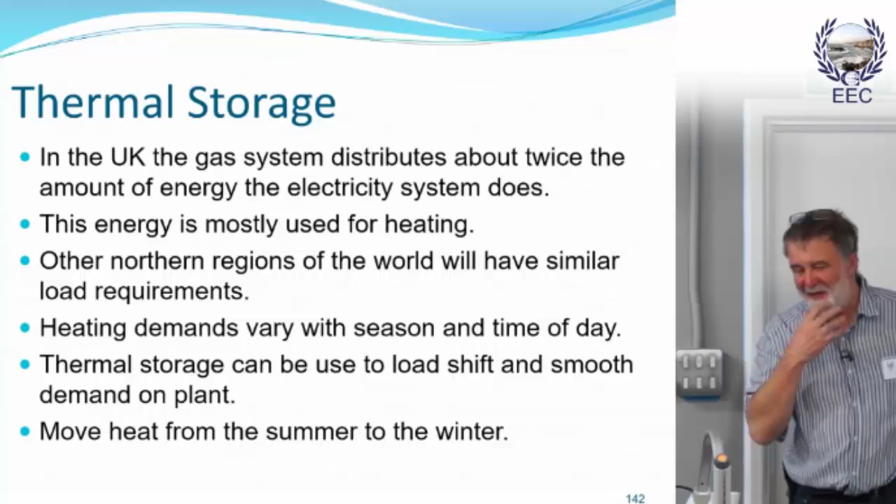And it's worth noting that all across Northern Europe, whether you're talking about Northern Germany, Scandinavia, Northern France, we've all got pretty much the same sort of climate. And there is also a requirement for storing coolth, which is the other side of this particular coin. In hot climates, you've got exactly the same problem, whether it's refrigeration or air conditioning. You can have peak demand times, and you want plant to be able to ride through that peak demand. So storing coolth, i.e. not heat, but something much colder, can also have some benefits for plant as well.

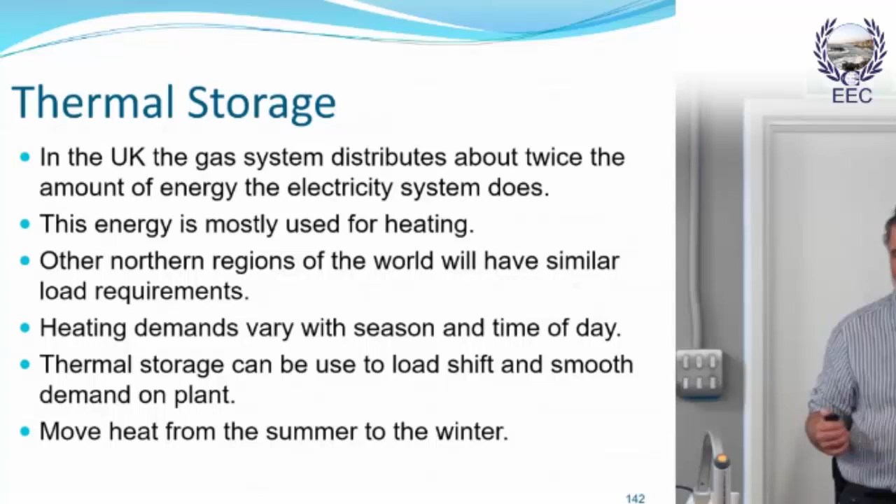And then we'll also look at, can you move heat from the summer to the winter? One of my favourites. So thermal energy storage, TES, can be done by a number of different processes. You can either store heat by a temperature change, either heating or cooling. So I could, for instance, just cool down a bit of this building. These are nice solid walls. If I cooled them down, I could effectively use that as an energy store, or warm them up. That would just be using a simple temperature rise or fall. And you could do the same with cooling.

But the other way of storing heating and cooling is as a phase change. So can you get something like water to melt or freeze, or can you get it to change from a liquid to a gas? That latent heat of vaporization or freezing is another way of being able to store heat. And basically, you reverse those processes to release that heating or cooling effect. And there are a number of different options which we're going to look at.

We can use thermal mass, just use the weight of materials to do it. We can use water, which is a fantastic energy store. We can store water in tanks, or we can use it underground, or even in aquifers. And then we can use phase change materials, and this can be everything from water to waxes to a whole raft of different materials to molten salt. They can all be used as heat stores.

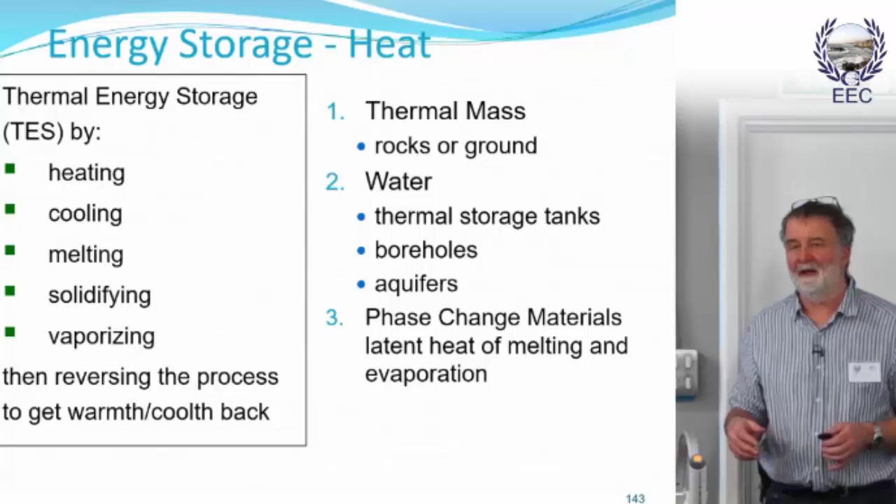So the energy you need to heat a volume of a material is the mass of that material multiplied by the specific heat capacity multiplied by the temperature difference from the start to the finish temperature. So if I know the thermal capacity of this material, that's the amount of energy it takes to heat 1 kilogram up by 1 degree Kelvin, and I know how much it weighs, and I know that I'm heating it up from 10 degrees to 15 degrees, I can calculate the amount of energy that I store.

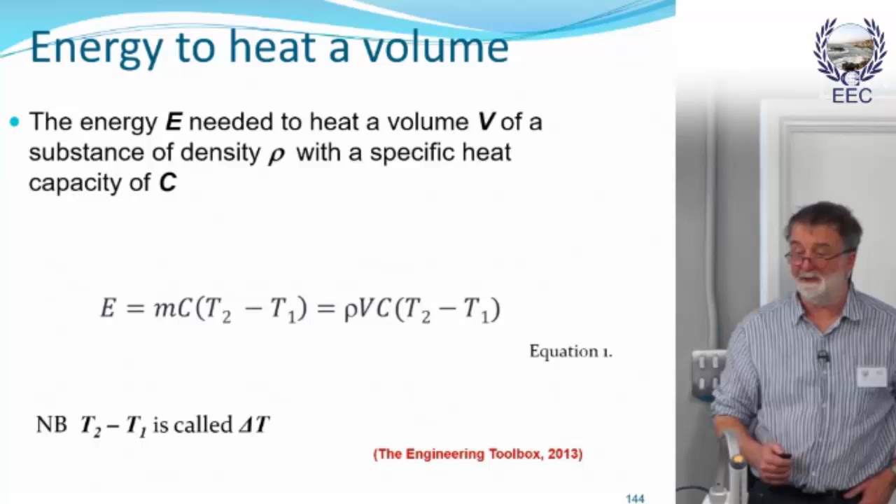But because there's all of this mass there, it absorbs the heat as the sun falls on it, and it warms the mass up. So the air doesn't get really, really hot. What you can then do is you can use that to moderate the temperature in the room. It doesn't get too hot during the day, but then at night, it will also cool down again. It will sort of heat the building over the night. So it smooths the temperature profile of the building.

You could also deliberately cool that mass at night. So during the day, if you're using this mass to keep the temperature down, you don't want to heat the building, you might ventilate that space at night. And what it will then do is it will cool the mass down. So the next morning when everybody comes in, everything's going to be nice and cool again. And you're ready for another bright sunny day. And you can knock a lot of degrees off of a building, knock 10 degrees off of a building by doing that cooling arrangement, if you have a big temperature difference between day and night.

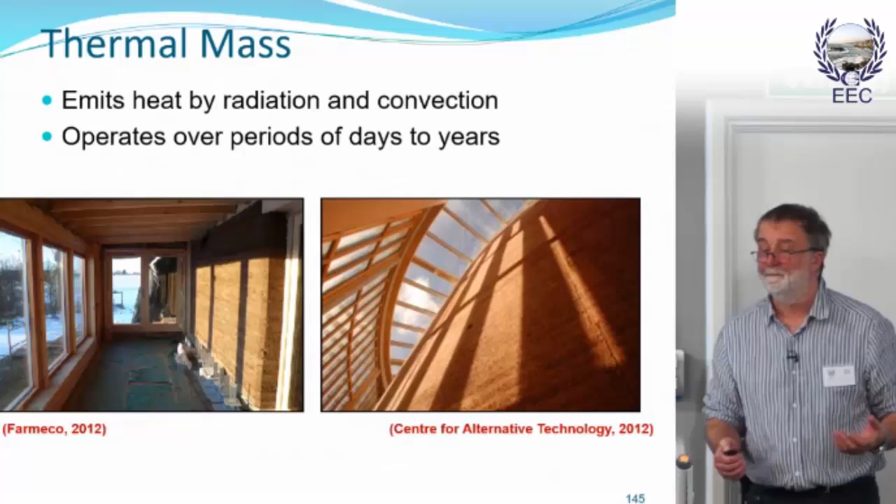We could create virtual mass. We could just use water as an energy store. And water's fantastic. It stores a huge amount. It takes a lot of heat, a lot of energy to heat it up. And because it's a fluid, it's very, very flexible. That's why people use radiators full of water. It's because water just moves a lot of heat for not very much mass. And it becomes a very flexible medium.

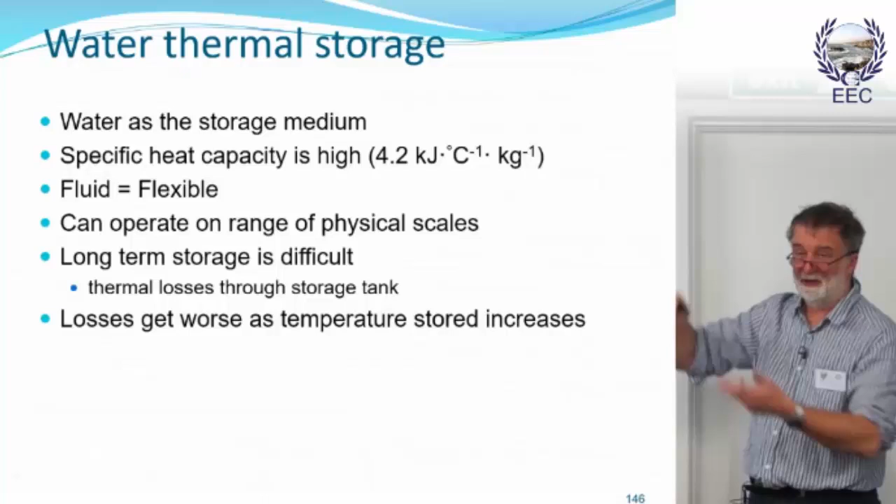The problem with storing water is that you've got to put it in some kind of container, and there's going to be losses associated with that. So you're going to probably land up insulating it some way to try and ameliorate those losses, but there are always losses. Just the same as with our batteries, thermal stores have their own inherent loss. And as we increase the temperature of that store, that loss becomes more. So you might say, well, okay, I won't store heat from 20 to 30. I might try and do it from 20 to 100. Well, at 100, the losses from your store are going to be 5 times greater than they were at 20.

So a common use of these stores are called accumulators. And they're basically just big hot water tanks, just like the hot water tank that you've got at home, or may have at home if you haven't got a combination boiler. And they are heated up usually off devices like heat pumps or biomass boilers, both of which don't like variations in demand. And the idea behind them is that you can heat them up, in the case of a biomass boiler, to maybe 90 degrees centigrade.

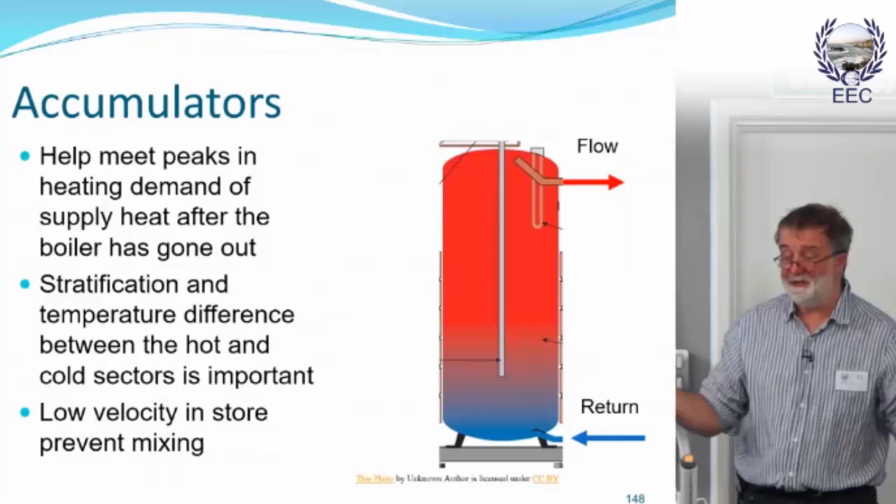Instead of getting a nice clear 10 or 20 degree difference between the two of them, you'll end up with only a couple of degrees, and that makes the energy storage less efficient. So you tend to want nice low velocities. When the water's being pumped round in the tank itself, it wants to be going nice and slow, because otherwise it just mixes it all up. And that's usually achieved just by making the tanks really big.

So that's the sort of domestic scale. And at a domestic scale, for a heat pump, you might be talking about something as modest as 500 litres, about 3 times bigger than your hot water cylinder at home, all the way up to a biomass boiler. A 300 kilowatt biomass boiler might have 10 to 20,000 litres.

One of the applications for these kinds of stores is on large-scale district heating solar schemes. These are schemes where instead of putting solar thermal systems on the roof of your house, you've put them out in a field or on a block of flats, and it feeds heat into a district heating scheme. This just gives you an idea of the sorts of sizes of kit you need.

So if you've got 30 or 40 housing units with 60 people in them, that sort of scale, then you might be talking about 1 to 1.3 square metres of solar thermal per person, and you might be talking about 70 to 100 litres per square metre of collector area.

So if we did have 100 people, let's go for 50, because then I might be able to keep that. We'd need about 50 square metres of solar thermal, and we would need something like 50 times 100, so something like 5,000 litres of storage for that. And then that would deliver something like 350 to 500 kilowatt hours per square metre of solar storage.

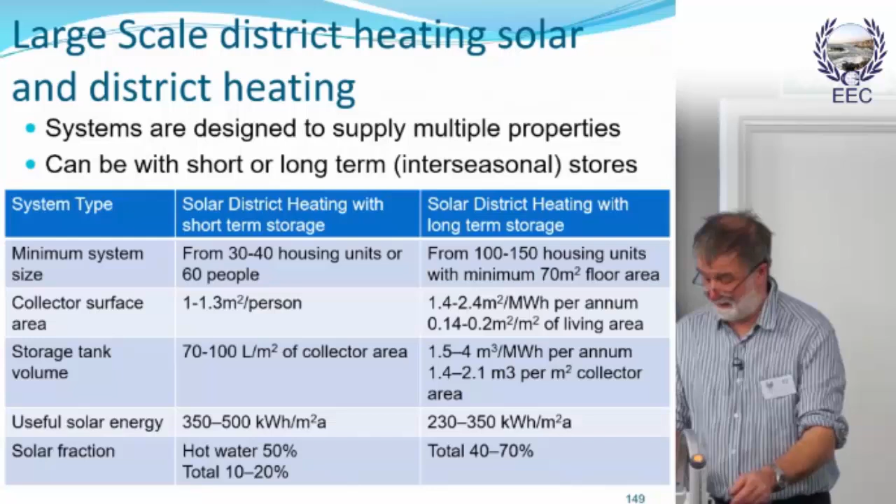Out of that system, they get heat at about 3 pence a kilowatt hour. Well, 3 euro cents, I beg your pardon, that's cheaper than 3p, isn't it? No, that's a little bit more expensive. So when you consider domestic gas price at the moment is 4p, and then you put it through a gas boiler which is only running at 85% efficiency, it lands up at being 4.7p. You can see it's actually quite a good deal.